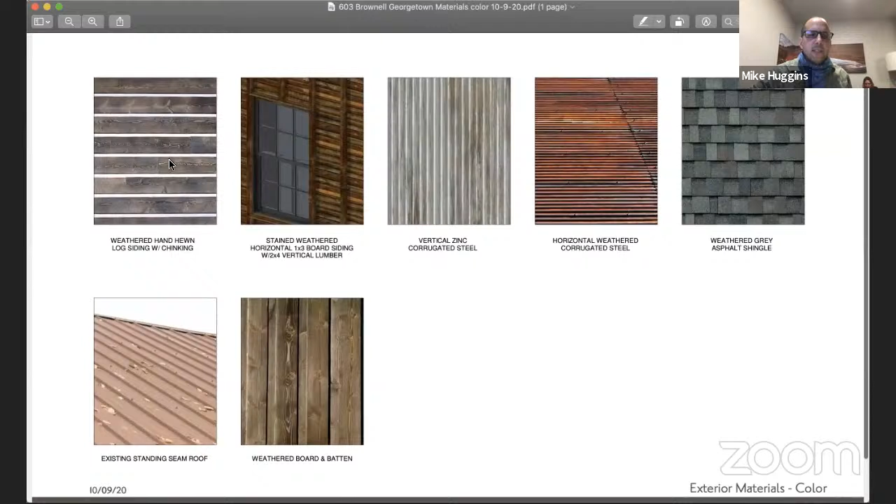Okay, so here we have some materials in color. The weathered hand-hewn log siding is what I think most of you are questioning. I'm going to see if I can pull up this example photo. Actually, it's a board siding, not rounded log siding—it's flat logs, hewn logs.

I like the white lines in between, which are chinking. So is it actually siding with chinking, or is it built that way—is it a panel or is it put-together siding with chinking applied? It is put-together siding and chinking. There's a company in Grand Junction that hand-hews the siding so it looks as if it has saw cuts in it, and then you add the chinking to it. Okay, okay.

And that goes on, the east wall and part of the south wall. The east wall is the one that has the oriel window in it, the one that faces the street.

So that whole facade facing the street, and then the north and south side of that also goes around to the south. Yes, it's on the north and south side of that front portion of the house. So it forms three sides, feels like the whole house until it takes off towards the west.

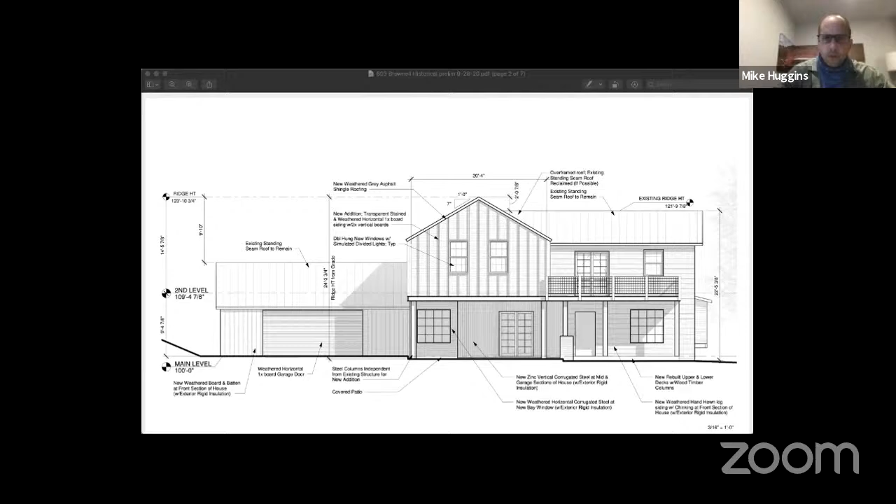When we look at the east elevation, given you have something up on the screen, is it possible to pull that elevation up? Hold on one second. Did that bring that up? That's the south. Okay, but we're going to need the east. Did that show the east? Yeah, perfect, that shows the east.

I'm hesitating because the siding may make a difference here. But in general circumstances, we have a section in our books, unfortunately not in the general book, about window proportions being 1 to 2 - twice the height than the width, and preferably 1 to 2.2. These are a little bit squared off; we would tend to go for a bit more vertical emphasis and a bit more height over width if it fits.

Cindy, what about just the bottom one? There's that kind of bay window on the right that's bigger. I was going to get to the bay in a minute - I was talking about the other three. But I was going to say if the window to the left of the bay window was taller, much more proportionate. I think the upper ones, being on an upper story, might not need to be as tall.

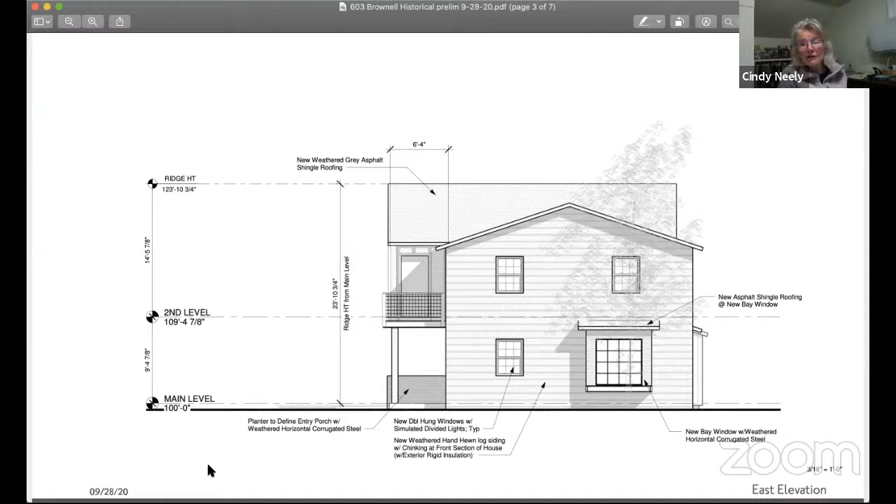But what's interesting is on your south side, your new windows in the addition do fit that dimension. Yes, we have more ceiling height on that side. On the new addition, the existing ceilings are really low in the front. Aha, okay. And so they're close to the door heads, you can see. So they're at 7 feet. Gotcha. Okay.

I do think though that we could bring the window sills down, especially on the lower one, because that's a living room, so that would work with that area.

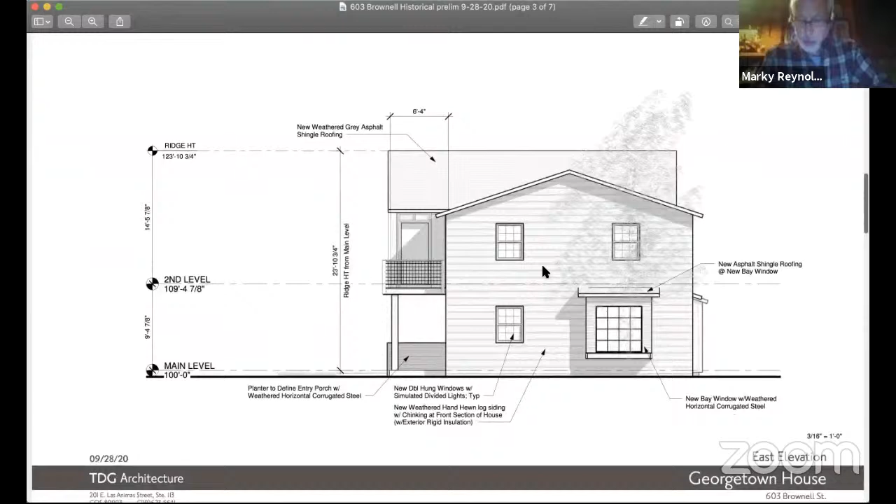On that east side, the window to the left, then what about your uppers? Could your uppers go down too? They may, that is a master, and maybe if we did a 2.6 sill... I feel like when you go a little too low with the sills, you lose a lot of privacy, especially since it's right on the street. So you don't have the option of having your windows or curtains open, you tend to have your blinds closed all the time. But this is the side that you're going to actually really see the most.

Yes, and I think it's important to have those windows matching, or at least similar in size to the one down below. That would match what the neighbors are doing too, the bed and breakfast to the right of this has all the old original windows in the front. And that would help tie you into your neighbor's house a little bit, so it wouldn't look like you just chopped some holes in the facade and stuck windows in. Okay, well, you know.

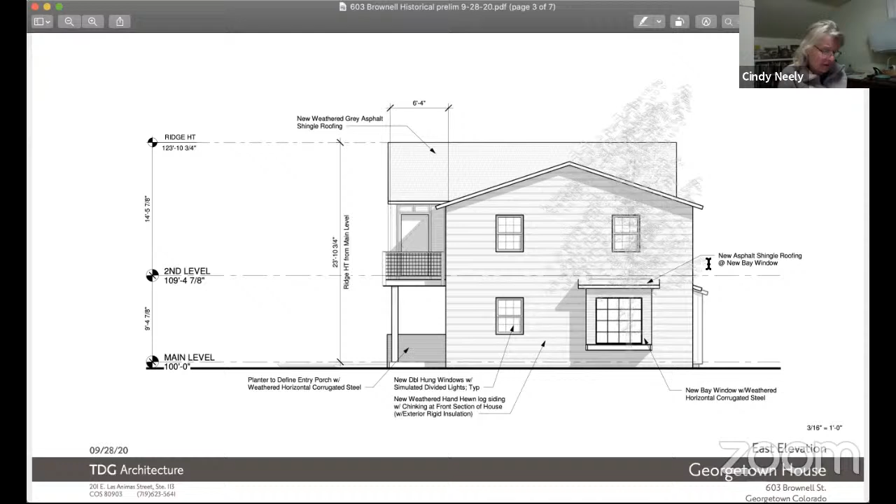Because I think the south side looks excellent and really illustrates what windows do, and I understand the roof slope is obviously different too, but if you had shortened up those windows, that whole south side would look more squat. Right, it would lose a good sense of its vertical emphasis, and our guidelines tell us to head towards vertical emphasis. This is a horizontal house, but there's actually good vertical emphasis in that middle piece.

Yeah, I think that kind of relates to it being a mining outbuilding, something a little different in the mixed area. Yep, yeah.

I also would give some consideration to how many panes, how much subdivision of those windows that you want. Okay, yeah, and you said you'd like fewer. Yes, I mean, you're showing a lot of 6/6 in the drawing.

They're definitely that way, but that's not the point though. What about the French doors? There's a pair on the balcony and a pair down below the addition. Do those need divided lights? Is that preferable or not? I think, again, you may want to limit how much divided lights.

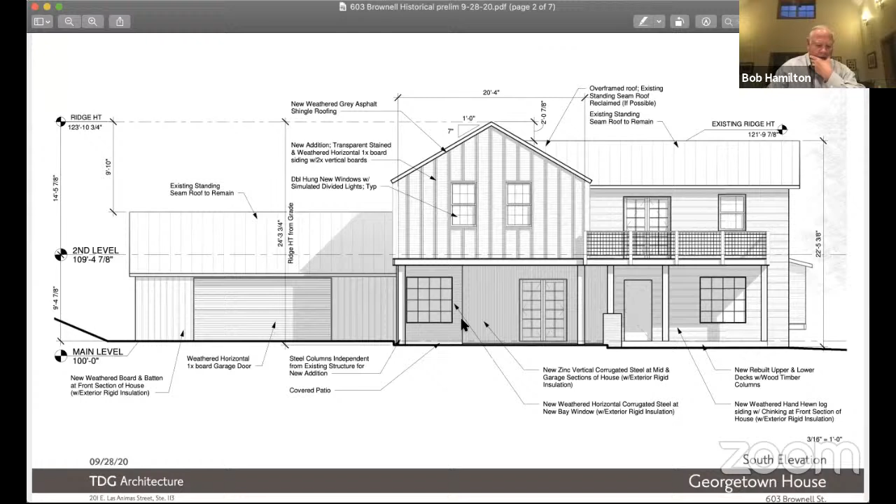So that whole bay that the window is in, it's a bump out? It's a bump out, exactly. Yeah, oh okay, all right. Thank you, Bob, because I missed that it was a bump out. Yeah, if you look at the site plan, you can see that it's a bump out.

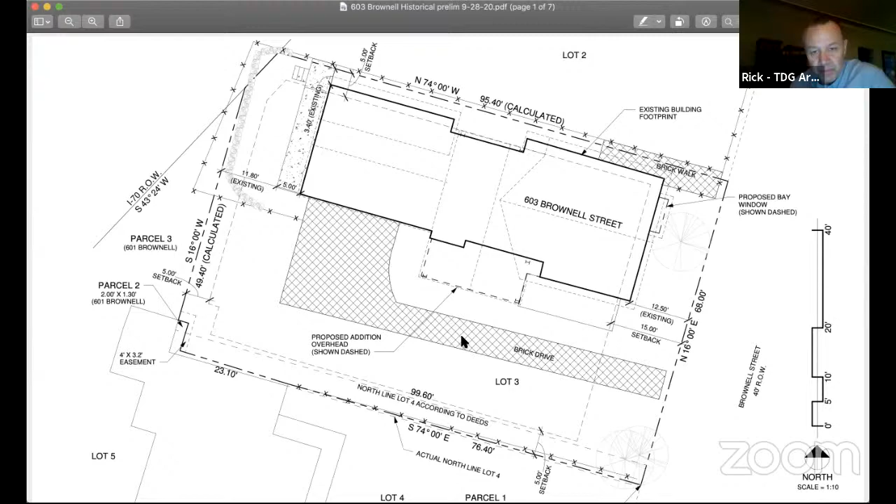What are the simulated divided lights? What are the lights going to be made of? I think we'll probably go with the better middle version of them, where you'll have the wood on the outside, you'll have the wood on the inside, and then you'll have the filler strip in between the panes. So when you see them from the outside, they really look like divided lights. That's the goal with those - it's a Marvin window product, Marvin brand.

Just curious about the tape on the glass - or the metal inserts between the glass? In between the glass, yeah, exactly. They'll appear to be real divided lights, as good as they can do without having the real thing.

And does the window on the east end of this south end, does that exist? Currently, it does exist, yeah, and it's almost the same size as the one that's there, but it's divided - it's got a picture window in the middle and two operable windows on the sides, two casements. You mean that's what it has now? Right, currently. All right, and you're changing that? Yes, we're going to match the bump out on the east side.

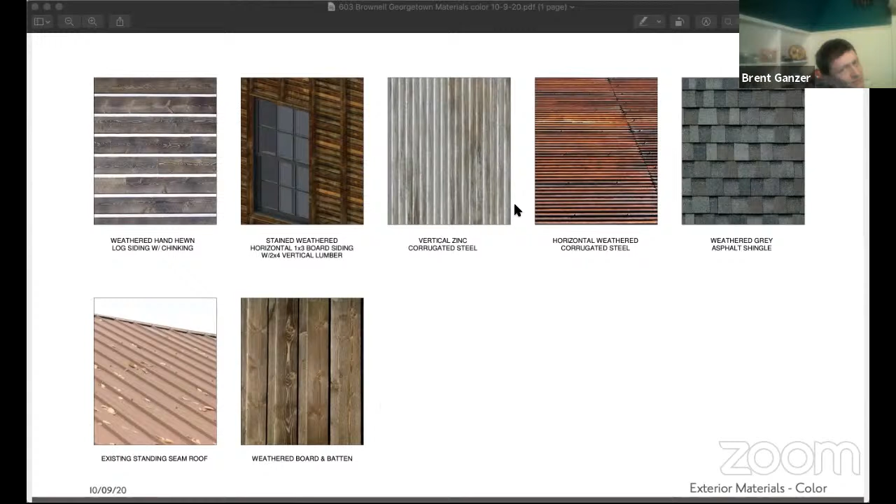So we'll have timber, large timber columns holding it up, and then I am showing a C-channel fascia board around the deck right now too, that will tie in with the new structure. So we have a C-channel that wraps around the base of the new structure, and then it will parallel along that.

So it'll be exposed steel as well. Is that weathered steel, or are you galvanizing it, painting it? What's the finish of the steel? That's a good question. We haven't really gotten that far. I think that Mike and Leica will want to discuss that too, on whether or not - I always like to advise that the rust will stain everything. So if you have exposed wood that you don't want to keep having stained and changing color, then you're definitely going to want to paint it. So that's kind of where we are with that one.

I don't have any concerns with it. The height of that railing is not the same as the height of the current railing. No, the current railing isn't up to code, it's too low. But it's brought in, and it isn't flush with the east facade of the building. Right. Because the current porch sort of overwhelms the structure.

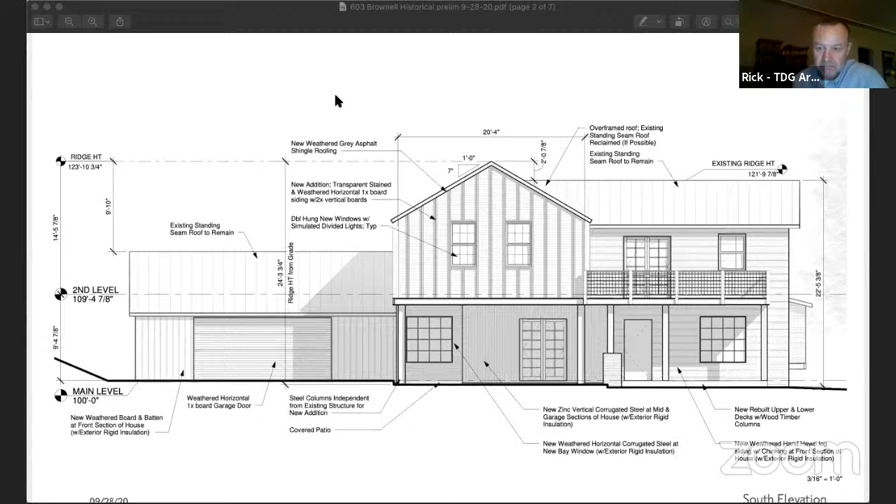Also, if there are any vents that come out of that roof, they need to be non-reflective, a matte color. So I think I'd like to have us note both those things, that the applicant has been told about those two items, the fence and the roof and the gutters, so, yeah, that about it.

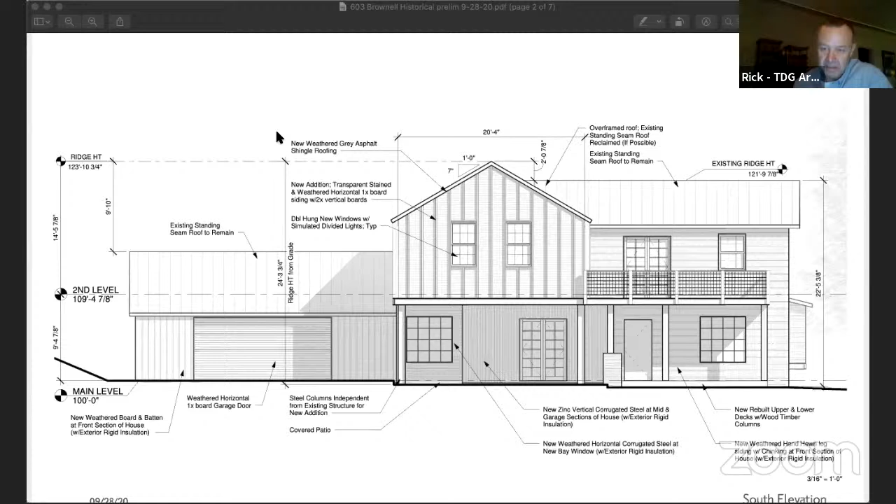Any exterior lighting should be dark sky compliant. Right, yep. About which we need to talk to your neighbors.

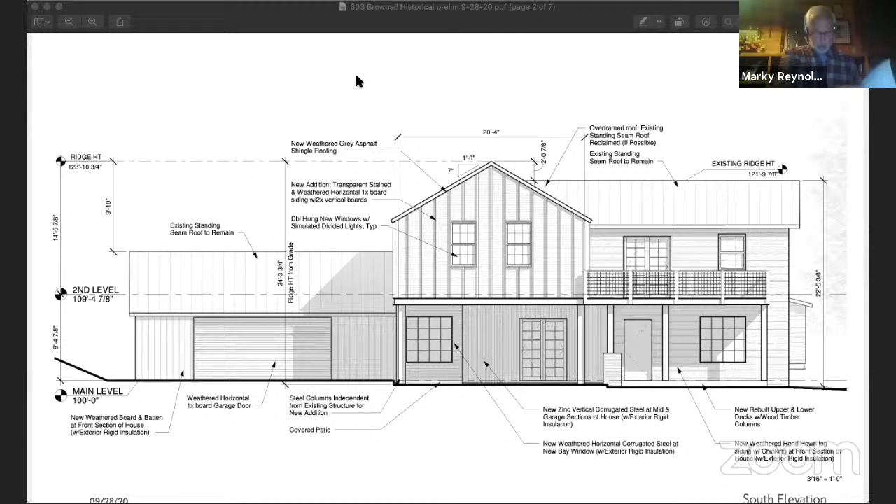You were mentioning a roof because we have a whole new roof line in this. Yeah, it was chapter 8, page 82, section 6. C, roof materials on new buildings should appear similar to those traditionally used. And C1, 30-year or greater composition or composite shingles in muted colors are appropriate.

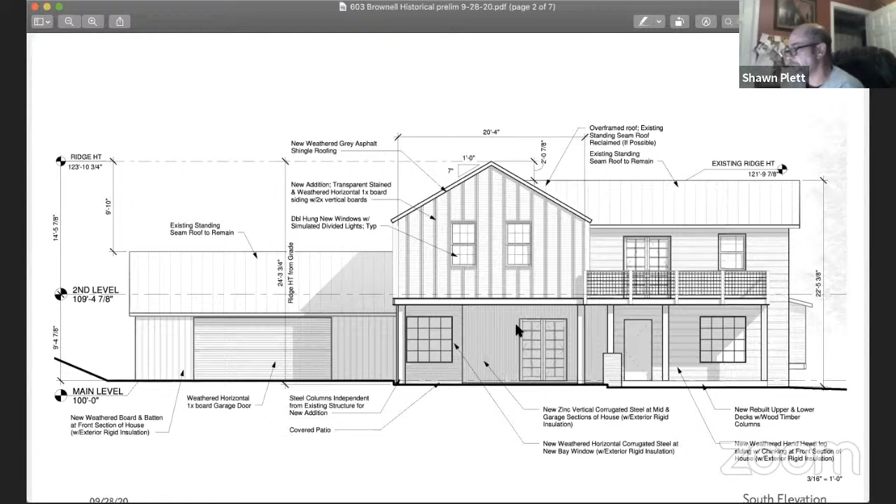And then for the gutters, page 83, E, gutters and downspouts are appropriate if painted to match the structure, or colored in whatever way to match the structure.

There's something on roof form. Are we in the historic mixed use? That's what was marked, and I think the dividing line is the next block over, once you get to Fifth, to the post office. So I think it's mixed use. Yes, so do I, which would mean that it is mixed use.

Page 28, under historic mixed use character area, section 2: the roofs should be in the range of 7:12, which is what you've got on that roof.

Yeah, so I didn't want it to be too tall. We were thinking about it as more of a mining outbuilding, so I wanted this one to be a little more subordinate to the houses next to it. I didn't want it to be too tall if we made it too steep. Yes, but it is steeper than your front one. Yes, it is.

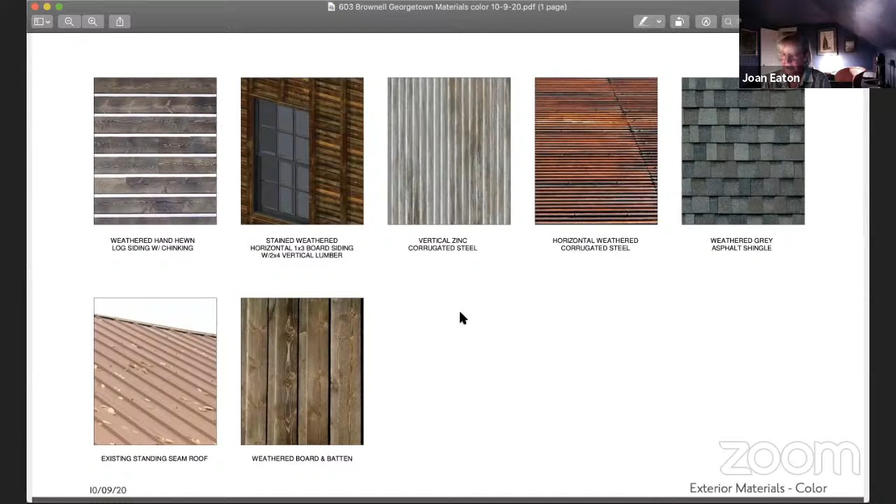Okay, do we need anything else? I don't think so. I think it's gonna be a lot of fun. It's gonna be fun to watch. I'm pretty excited about it. That'd be so really nice.

Can I hear a motion? I move that we approve the application with the findings as noted and the stipulations. Can I hear a second? I'll second. Is there any more discussion? All in favor? Aye. Aye.

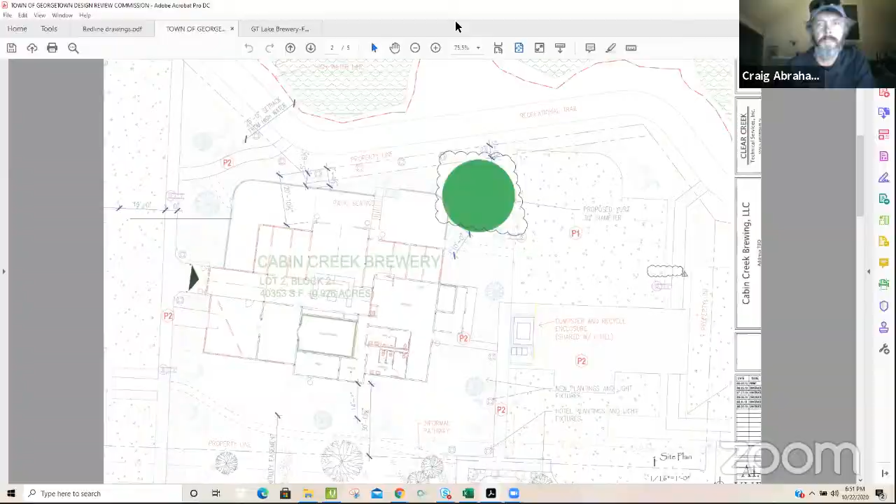I don't know how many of you have ever had a chance to be in a yurt, but that's kind of what we're looking at. I've had the pleasure of building 2 or 3 of them now and then taking them down and moving them. They're not fun. Yeah, it's a nice structure though.

I'm curious, did you get the insulation package for them? I did, yeah, that kind of helped. It's got the wall and roof insulation package on it, so it'll make it much more comfortable. You know, this is not an indoor dining experience. It'll be classified under COVID rules as indoor in terms of seating capacity, but folks will be advised that they're entering an outdoor environment for their experience.

So you're not heating it? No, we don't have any intention of heating it. We'll just do string lights in there.

Honestly, I've been in a number of these. We constructed 6 of them down at Lawson Adventure Park a few years back, and heating was a major concern on the front end. Once they started operating them, only on the coldest nights did they even use the heating source they have in those now.

All right, has anybody got any questions? Does it get ventilation in there? Yeah, so all 3 of those windows are operable, it's natural ventilation. 2 doors, and then the dome is operable as well.

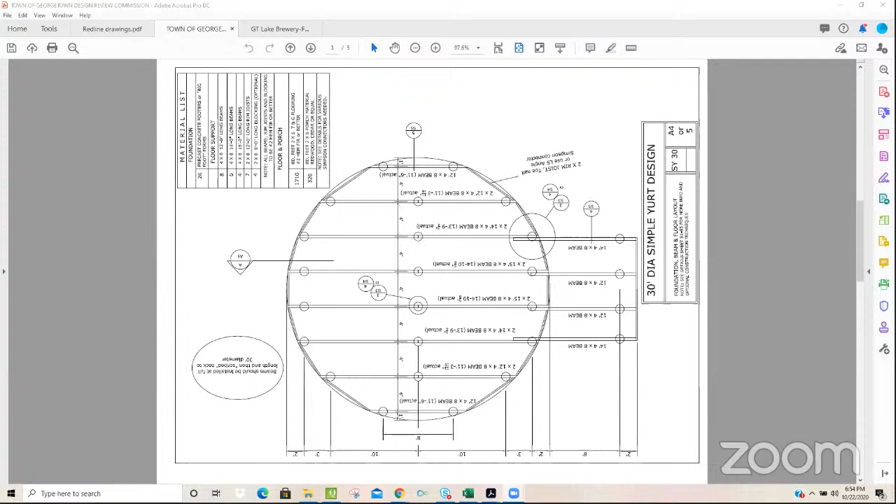Cindy, I was trying to get unmuted. Okay, and what did you say? Yes, it requires a temporary use permit. And I've been in discussions with Safe Built regarding the building permit or what would be required for it.

Okay, so the temporary use permit would indicate the date at which this needed to come down. Yes, it absolutely should, correct. Because Craig, you actually had a temporary permit for something else up in town, I recall once.

Yes, I don't remember. That was when Tom was here. Yeah, the big dumpster by the... Oh, it was the 20-foot Conex up by Town Hall there, on that lot. Yeah, yeah.

Same thing, though I think the time period on that was different, but this is going to be 6 months as governed by the building code. A temporary special use permit, I think, can go 9 months if I remember right from that experience. But this will be 6 because that's what the building code allows for. And the reason I stress that is that in general, I don't think this is necessarily a form we would choose for permanent structures.

And not that there are very many places you could put it, but I don't necessarily want to encourage the idea that yurts could be used as permanent houses. Oh, yeah, certainly, I would agree with you 100% on that.

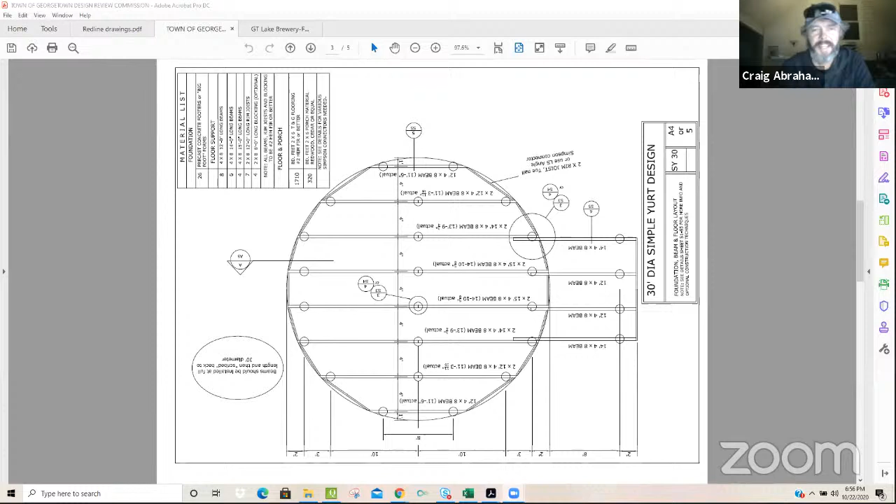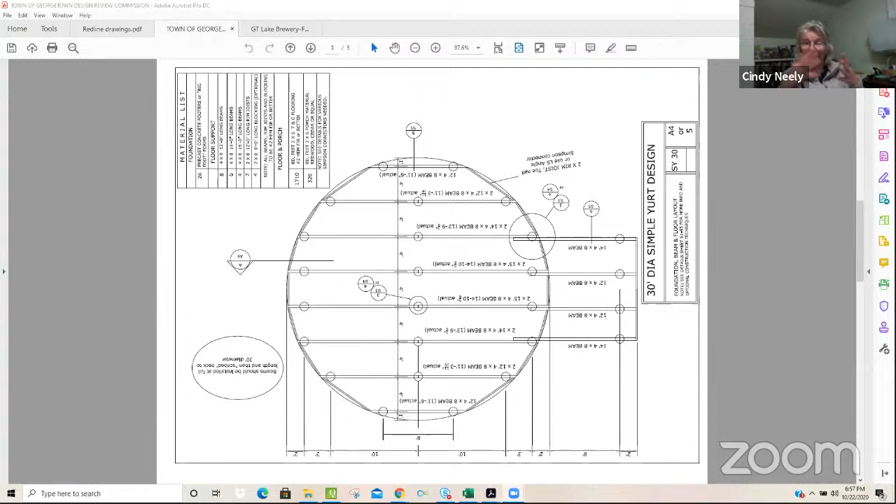Ken and I had this conversation a couple of weeks ago. But I think it's very good for it to come to the DRC, because the DRC has to make clear, before things pop up in other places, that we have taken a look at this, that it is there because of a temporary use, because of the pandemic that we're in.

It has a commercial use. It is not a form that the DRC would consider appropriate for other uses, and I think that needs to be clearly stated. That's why I think it needed to come here. Yeah, I think that's good. I think that's what we should do.

Okay, I've got that. And also I was going to double check with everyone on the decision form. I'm going to check that this is a condition where existing improvements are a hazard to public health or safety due to COVID, that they can't have their restaurant full. So this is kind of taken into consideration. That's good, yes, I would do that.

Well then, any more discussion or questions? Yeah, I think it doesn't really issue a certificate. I think it issues some form of statement to the town administrator, because it doesn't get a certificate of appropriateness, because we wouldn't give it one.

Okay, but we're kind of approving a special use permit for this structure, a temporary structure. I mean, it could be one of those forms like you were just reading, where we make a recommendation to another body in the government.